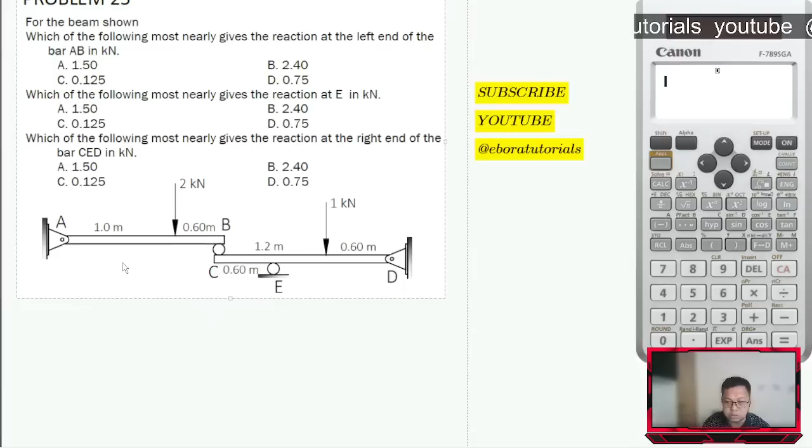So that is like this, and then this is the other one. If you notice, the other side, point A, is actually a hinge. So we have two reactions here: one is RAV. Notice, we don't have RAH there because if you notice, there's no horizontal load in the given. So it's all vertical load, so RAV is what we place there.

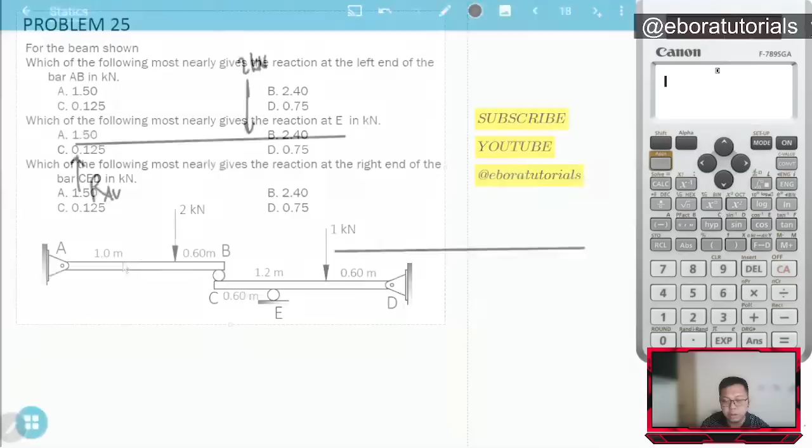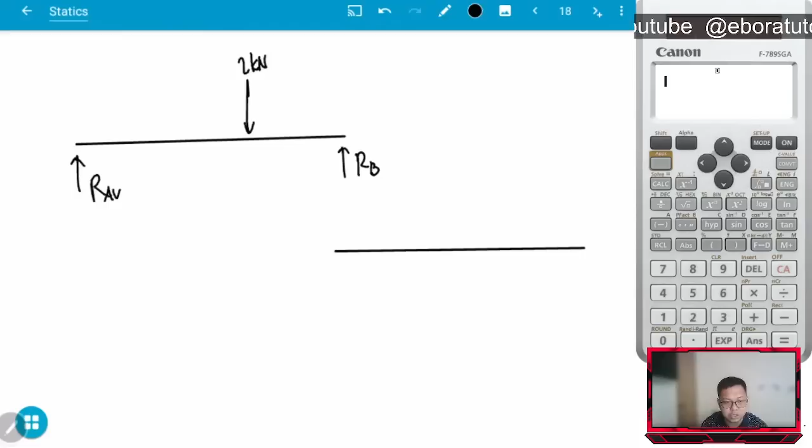And then we have a 2 kN load here. Notice, since we have a support here at B, then it will actually push the beam, or the upper beam, upward. So it will push this beam upward here.

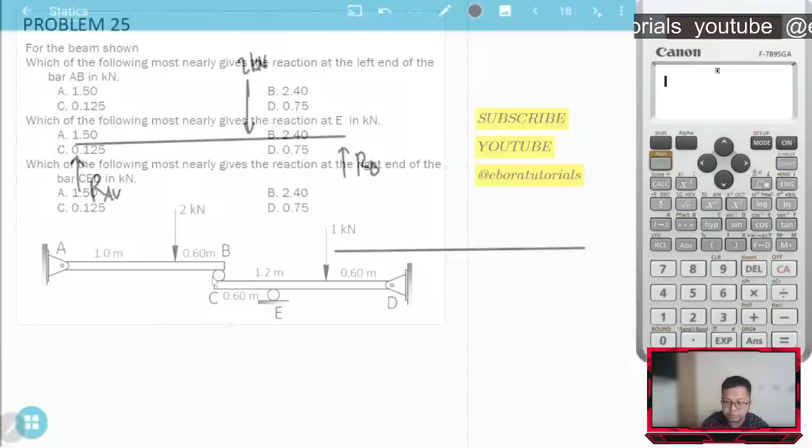Let's call this RB. Next is the free body diagram for the bottom beam. Now for the bottom beam, notice, since the upper beam rests on it, the roller at B will push the lower beam down. So let's place that here. Now the force that will push this beam down is actually equivalent to RB. And then we have a reaction at E, that's RE. And then we have RD, upward. We also have a load here of 1 kN.

And then let's write the distances. This is 0.6, this is 0.6, this is also 0.6 — 0.6 for all of them. And this is 0.6, and this alone is 1.0.

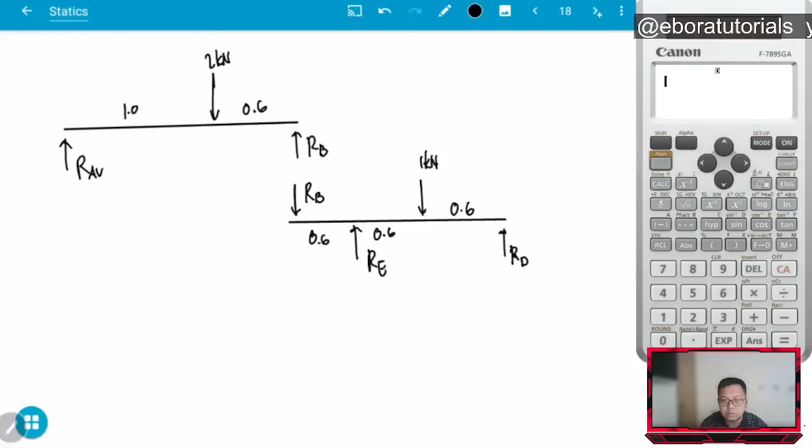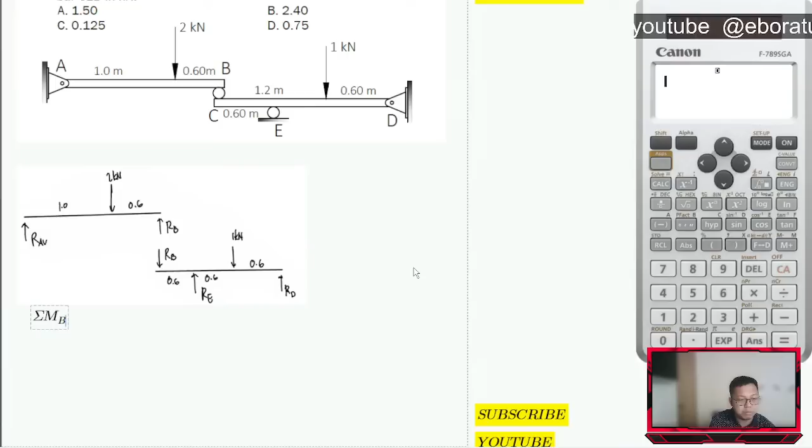What's the first thing we're looking for? The left reaction at bar AB, which is this RAV that we're solving for. So to solve for RAV, we consider the upper beam, the upper free body diagram, and sum up the moments at B. Summation of moment at B equals 0, where clockwise moment should equal the counterclockwise moment.

Now looking at the figure, for the upper figure, the clockwise moment will be caused by RAV with a moment arm equal to 1.6 from point B. That should equal the counterclockwise moment caused by the 2 kN load, whose moment arm is equal to 0.6. Again, we don't care about the 1 kN, RE, and RD, since we're considering the free body diagram of the upper beam only.

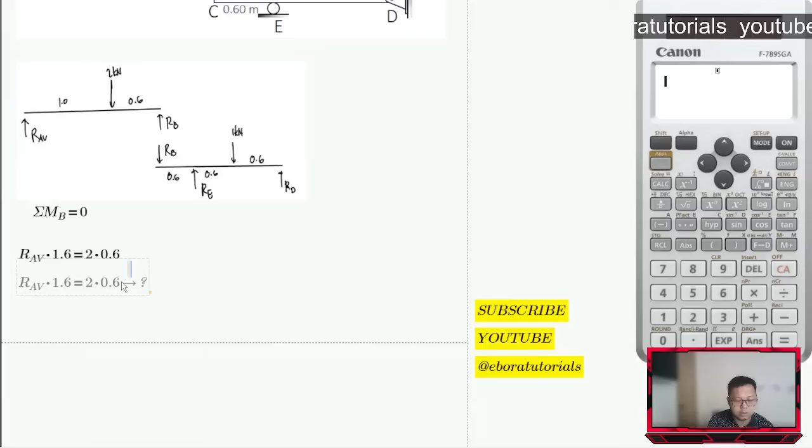And then you can just solve this using your calculator. So let's solve for RAV. We get RAV equal to... we have many possible answers here, 0.75. Do we have 0.75? Yes, letter D. Good, we're okay with that.

Next, what's the next problem? Next problem: which of the following most nearly gives the reaction at E? So this one.

We need to solve the reaction at E. To solve for the reaction at E, we need to consider the lower beam free body diagram. We can sum up moments at point D, but we need RB first. Without RB, we cannot sum up moments at D and solve for RE.

So how do we solve for RB? We can actually solve RB by considering the upper beam free body diagram. Let's sum up moments at A, and then we can get RB. So, summation of moment at A is equal to 0, considering the upper free body diagram.

The clockwise moment is the 2 kilonewton force, with a moment arm of 1.0 from A. That must equal the counterclockwise moment caused by RB with respect to point A. The moment arm of RB will be equal to 1.6 from point A. So we can now solve for RB.

Let's solve for RB. RB is actually equal to 1.25. Once we have RB, we can now solve for RE.

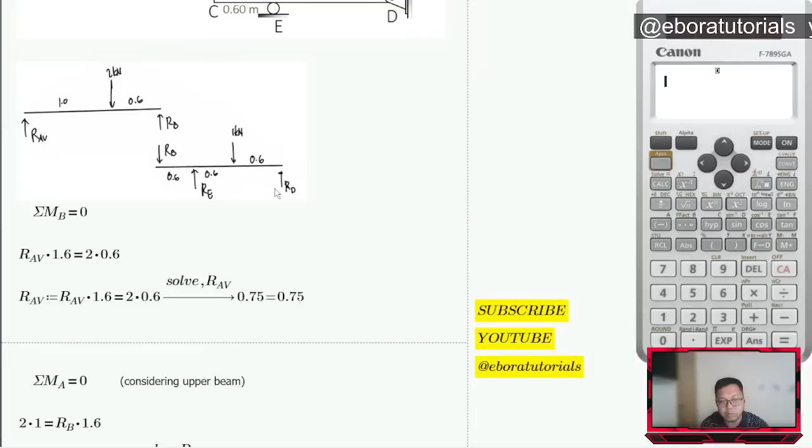Now let's sum up moments at D. But this time we need to consider the lower beam. So, clockwise equals counterclockwise.

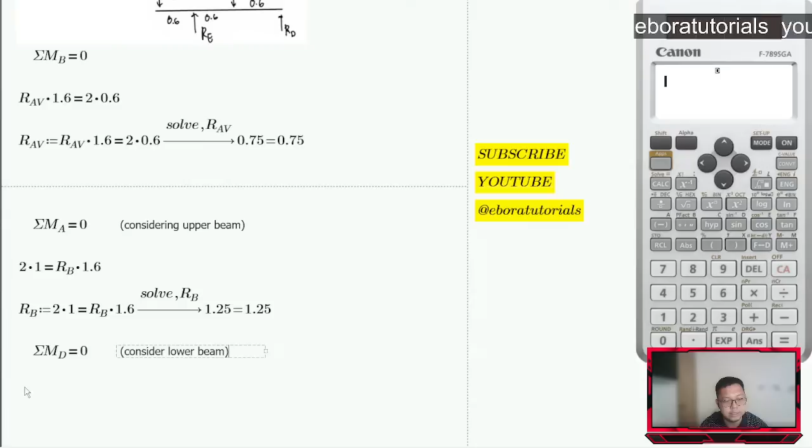The clockwise moment from the figure is caused by RE, with a moment arm of 1.2 from point D. RE is 1.2 from point D.

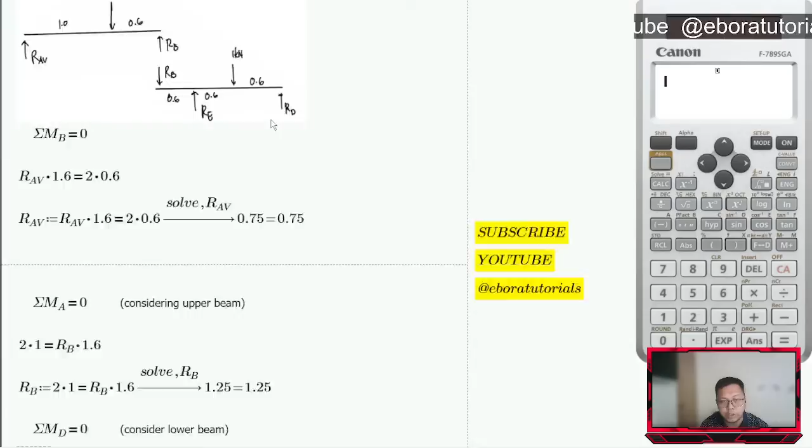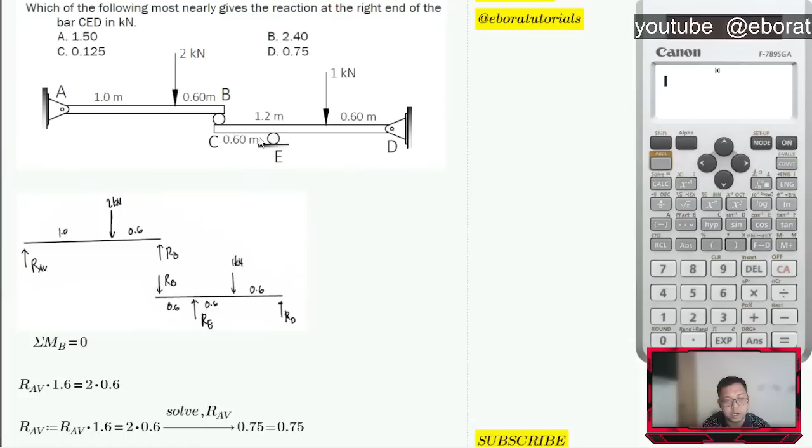That equals the counterclockwise moment caused by the 1 kilonewton force and RB. The moment arm of the 1 kilonewton force is 0.6, so that's 1 times 0.6. Plus another counterclockwise moment caused by RB with a moment arm of 1.8 from point D.

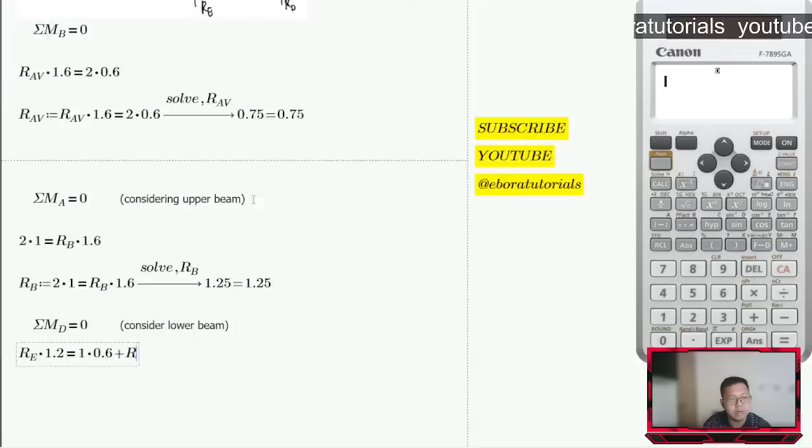RB times 1.8. Notice in our whole equation, where did the 1.8 come from? Correct, 1.8 is 0.6 plus 0.6 plus 0.6.

In this whole equation, the only unknown is RE since we already have RB. So you can use your calculator. For me, I'll just use this. So, RE is equal to 2.375.

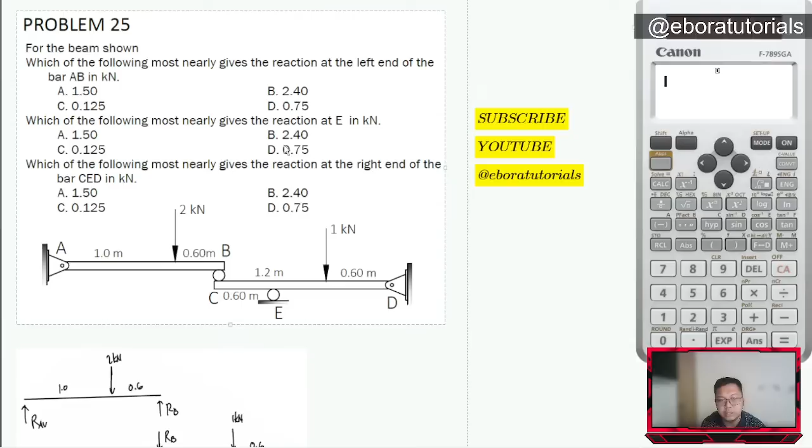For letter B. And lastly, which of the following most nearly gives the reaction at the right end of the bar CED? So this is CED. We want the reaction at the right end, so the reaction at D. To solve for the reaction at D, since we already have RE, we can just sum up forces vertically, considering the lower beam, equal to 0.

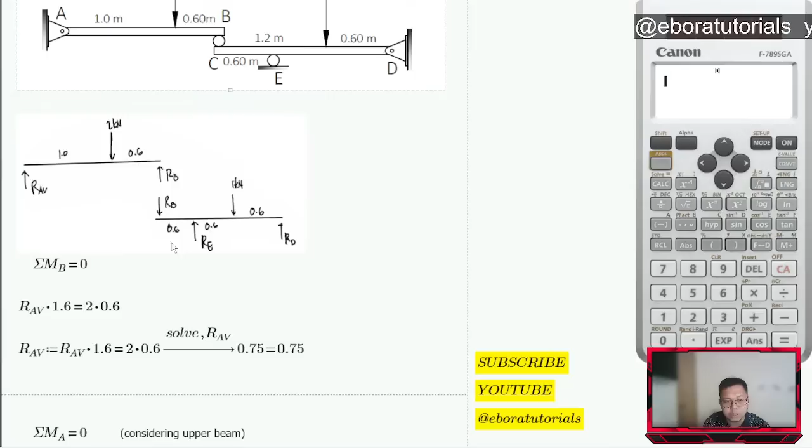Upward equals downward. So let's sum up forces vertical equal to 0. Based on the figure, the upward force is RE plus RD. While the downward force is actually equal to RB plus 1. That's our figure. RB and 1. Again, we're considering the lower beam.

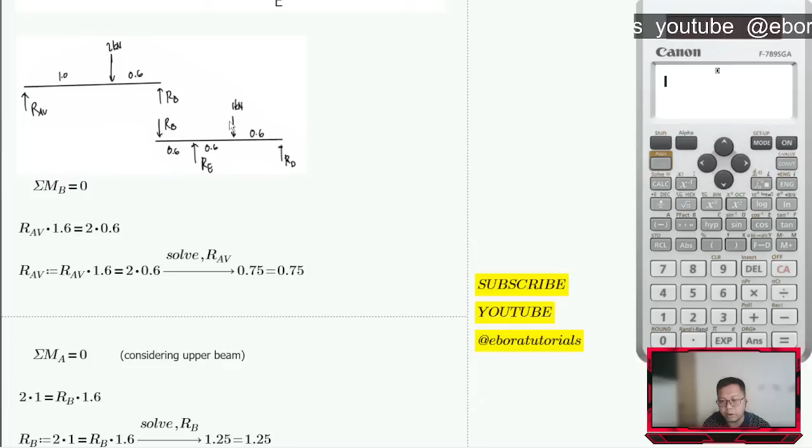With that, notice we have RE, we have RB. The only unknown here is RD. So you can just use your calculator.

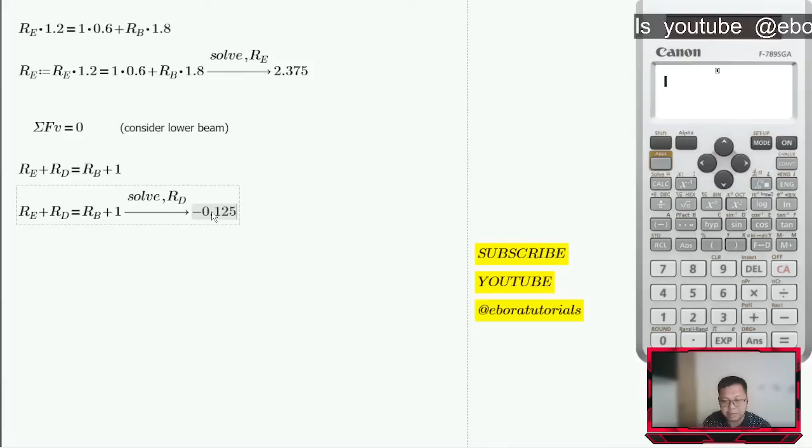Let's solve for RD. RD is 0.125, negative, meaning our assumption was wrong. I assumed that RD is pointing upwards, but supposedly this should be pointing downwards.

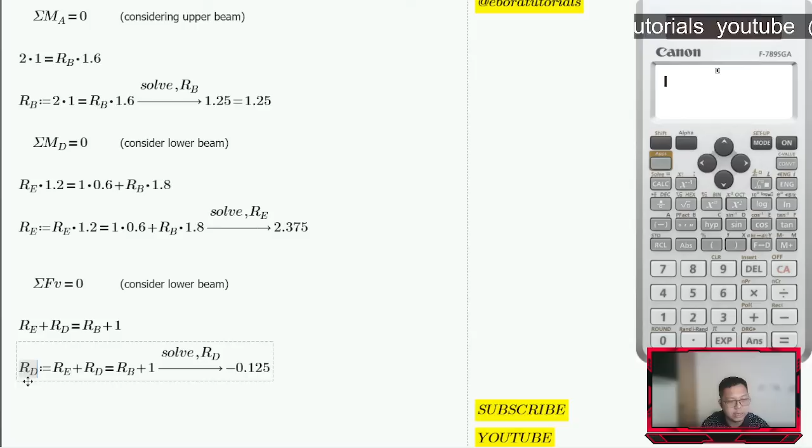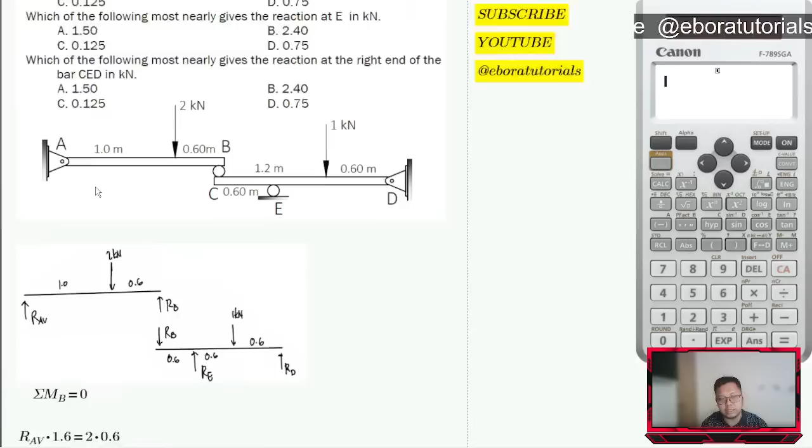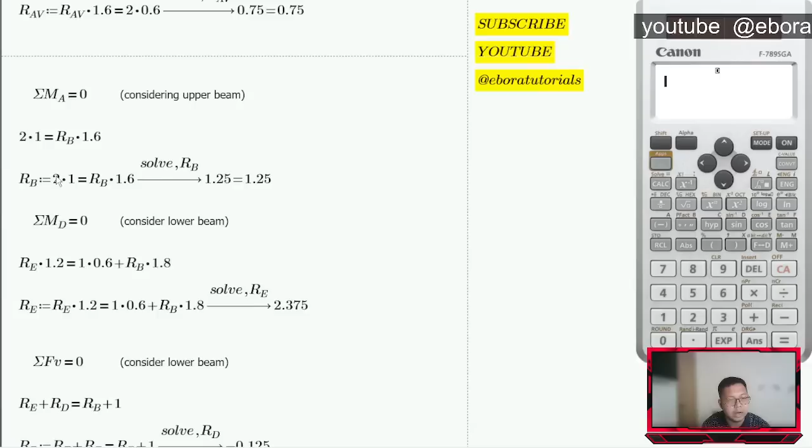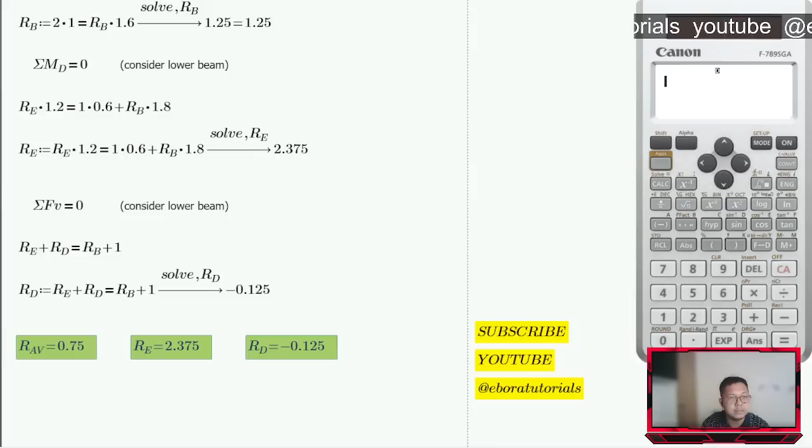I hope we're okay so far. So what we're looking for is R. What was that again? RA, sorry. What is being asked in the problem? RA, correct, RAV. And then we also have, what we're looking for is RE and RD. So far, all the answers are among the choices, right? 2.375, 0.75, correct.